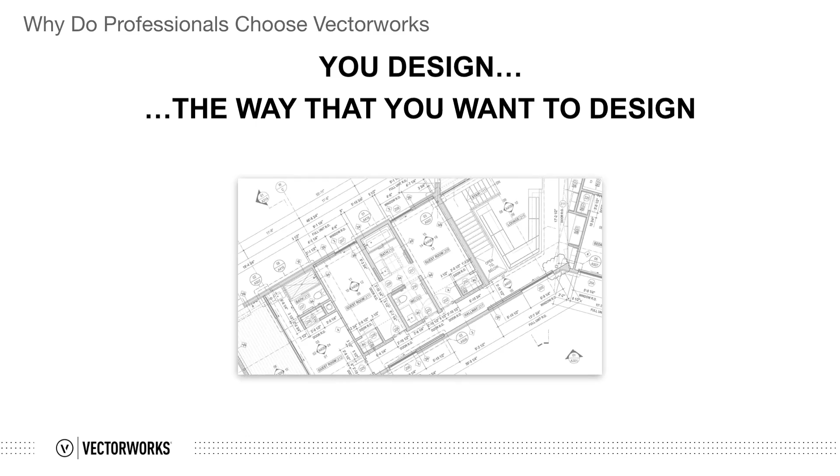This presentation is going to focus on the vast tool set included in Vectorworks to show you how design can be innovative and fun. Vectorworks is a great design tool. We're a technology leader with a user base of around 600,000 worldwide. It runs on both the Macintosh and Windows platforms, so you can design the building and everything in it. We provide the tools to help architects capture their ideas, develop them, and communicate them. So what makes Vectorworks great and sets it apart from the pack? You can design the way that you want to design. You don't have to follow a predetermined workflow. You can integrate Vectorworks into your office at any level: simple CAD, 2D, 2.5D, even 3D, or all the way to full BIM. It's your choice. So let's take a look at the tools built into Vectorworks.

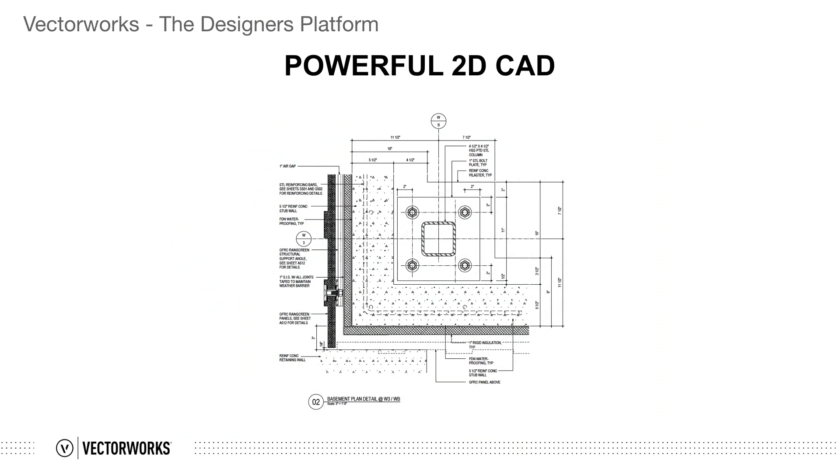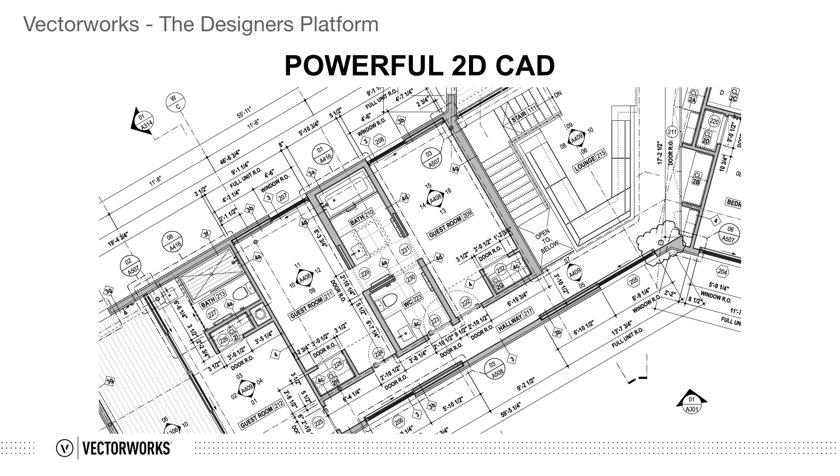Vectorworks has a powerful 2D CAD heritage. For more than 31 years, Vectorworks has been providing professionals with unparalleled CAD line work and graphics. 2.5D is where we integrate our parametric hybrid tools, such as the window tool you see here, to generate a schedule. These worksheets are bidirectional, so when you change the model, the schedule updates, and when you change the schedule, the model updates. By the way, if you're currently using a 2D CAD workflow and you're looking for an easy way to transition into a BIM workflow, this is a great way to start.

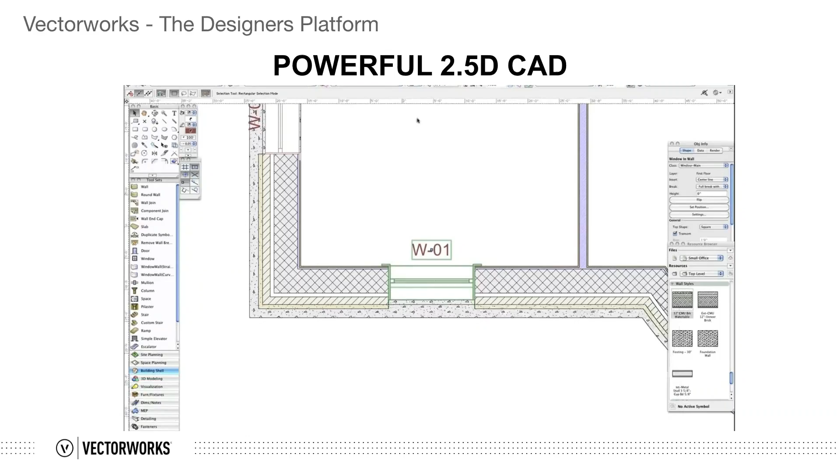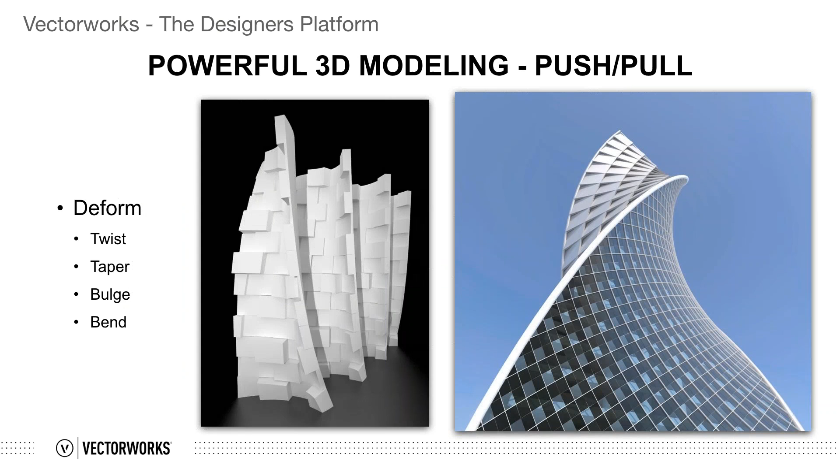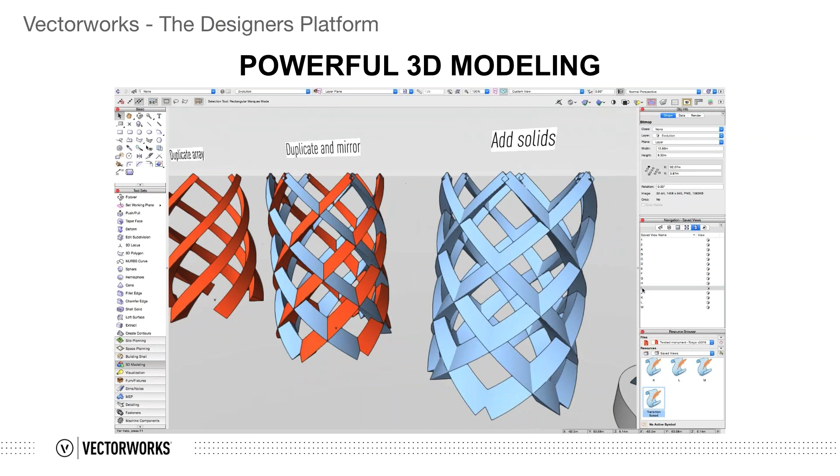Vectorworks has a powerful push-pull tool that will be very familiar to anyone who has used SketchUp. But we bring even more to the table with deformation options. Here's an example: start with a 2D primitive, then extrude and give it a twist. Extract an edge so it can be used as a path to extrude a 2D shape along. The extruded path can then be duplicated, mirrored, and converted into a solid shape. After a few more manipulations of the solid form, the result will be something that we can wrap an external structure around a building with.

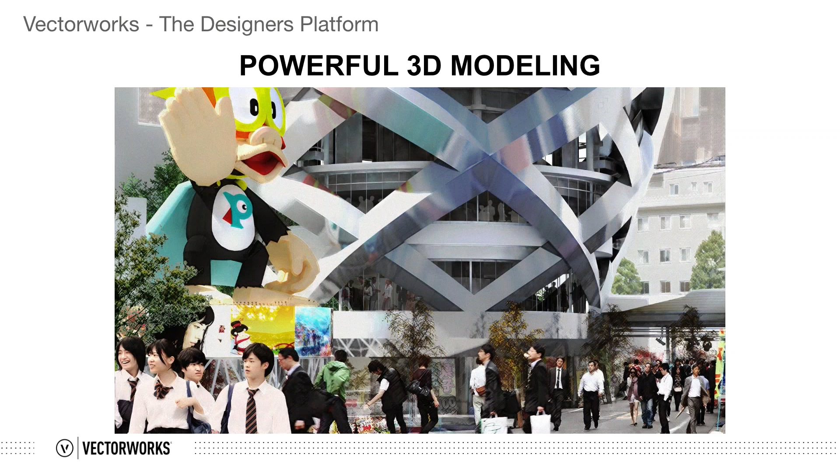Massing models for conceptual design can be produced in a number of ways within Vectorworks. Here we're going to use the push-pull tool to create a basic form that will take us all the way to BIM. Push-pull works in addition and subtraction.

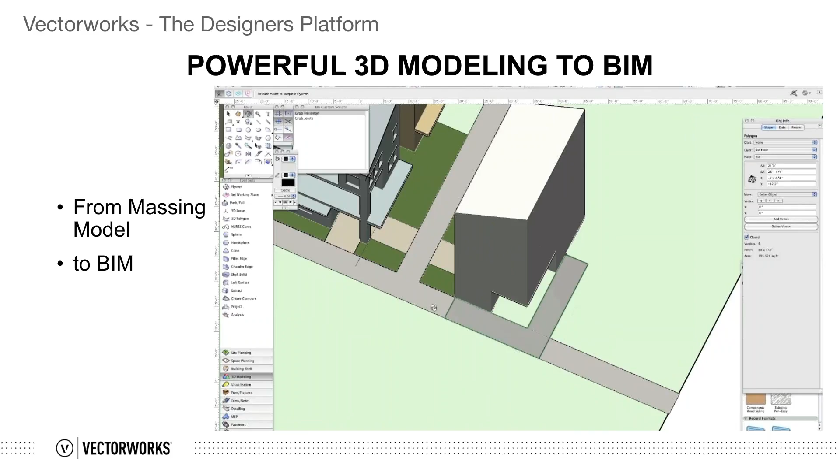Now we're going to add a few design elements like decks. We'll place them at the floor levels, and now it's time for the magic: model the floor plan.

This converts the model into intelligent walls. The walls can then be adapted with doors and windows, even a corner window like you see there. We can begin to build up the model, even the internals of the model, even add columns and posts out front.

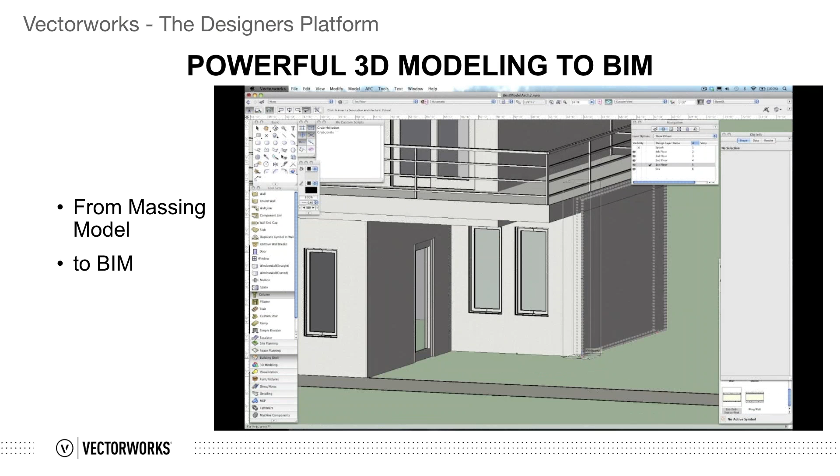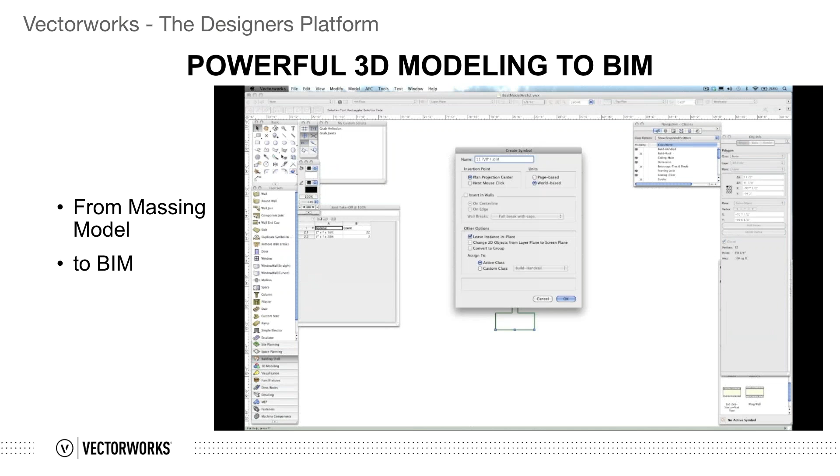We can build the model's floor package up, and we can really develop the floor package with joists that we can do takeoffs in the end. The joists themselves can be modified into TJIs, and you have your pick of how you'd like to do it. Eventually, we can render it up so we have something really nice to show to our client, a full BIM model.

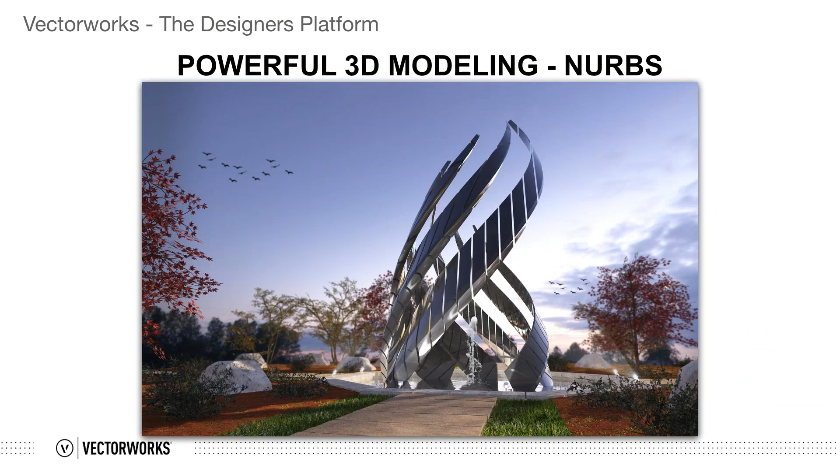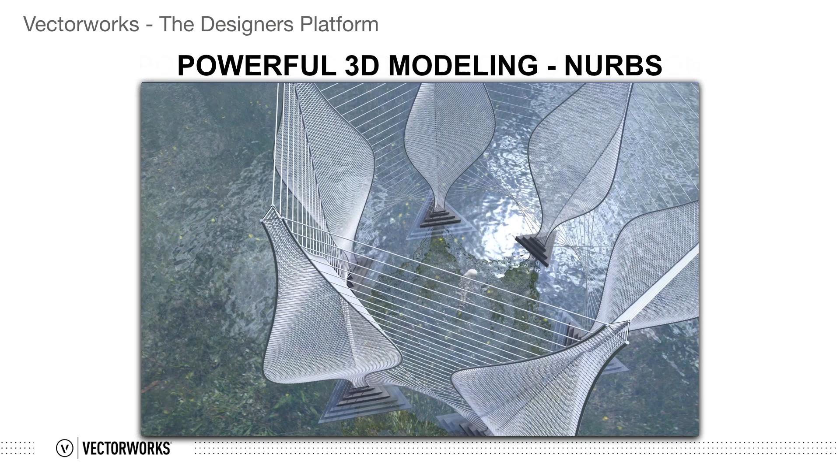Vectorworks also has a subdivision modeling tool, also known as cage modeling. It offers yet another powerful tool to make your ideas into reality. If you've never tried it, it's a lot like molding with clay.

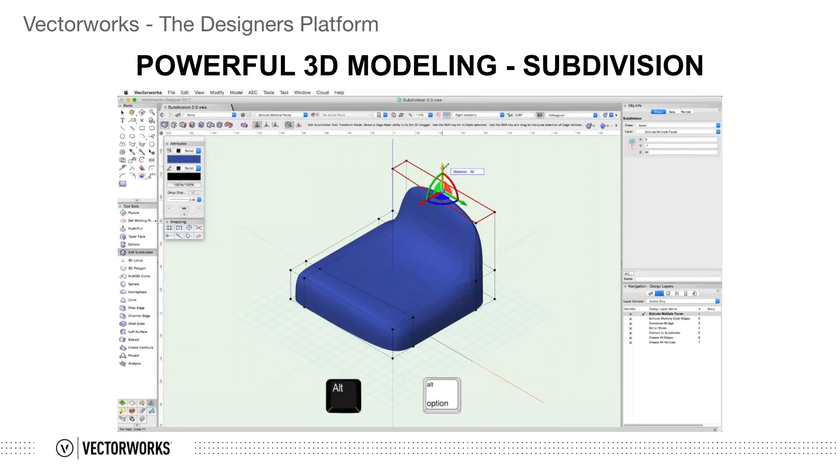Now, in its second generation, subdivision is more refined and more powerful. We added more ways to control the cage, and now we also have bridge mode. This allows you to join two subdivisions together. You simply open up the face and begin the bridging process. When you're all done, you have one model.

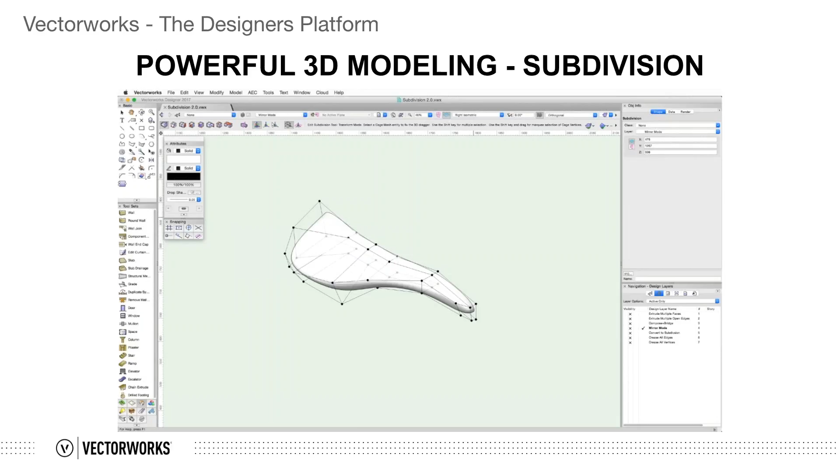We also added mirror mode, so when you're modeling, you can mirror the object around itself. It's pretty much straightforward, just like you'd think. You'd pick the axis that you want to work off of, flip it around, create your mirror, and off you go. You get the same controls, except this time it's reflective.

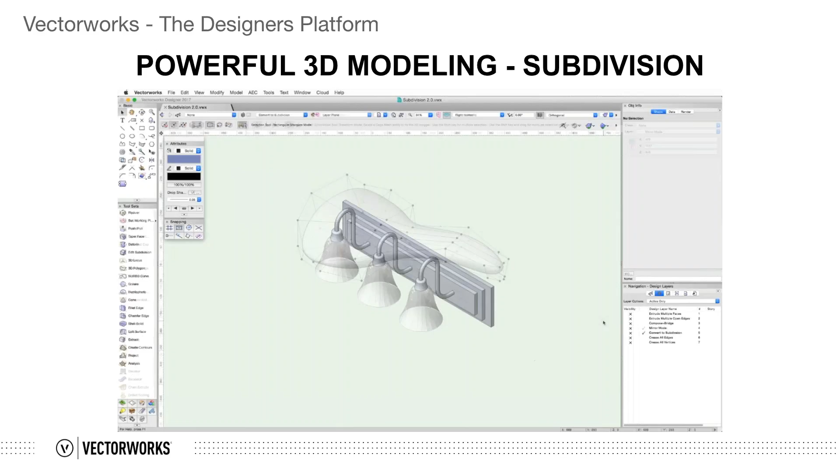In Vectorworks, we've also made almost every 3D object convertible to a cage model. This brings you control like you've never had it before.

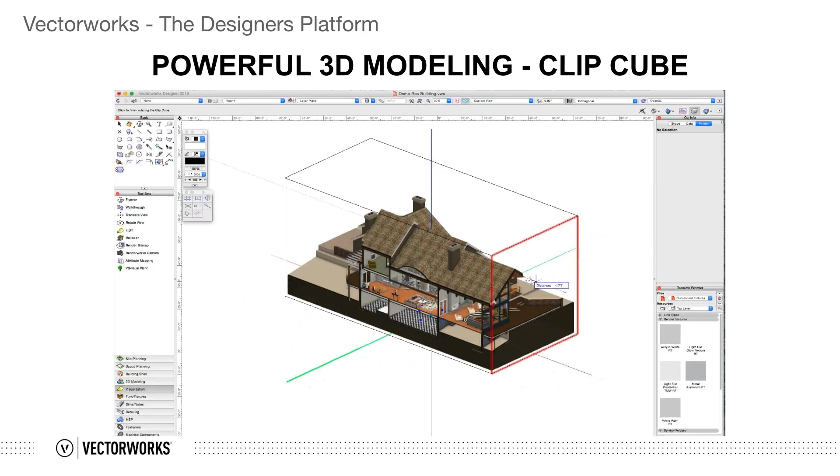So we've got our model all developed, or we're moving into design development, let's say, and we need a way to view the model holistically. That's where the ClipCube tool comes in very handy. This is a live action tool that you can move through the model both vertically and horizontally to reveal the inner spaces and study the workings.

Now let's move on to collaboration. Of course, within Vectorworks, you have all the usual suspects, and I hope some surprises for you. Most common, probably DWG, the longtime workhorse of the industry.

Yes, and now with 2017, you can bring Revit content right into Vectorworks. The bonus here is you can get content right from manufacturers and drop it right into your model.

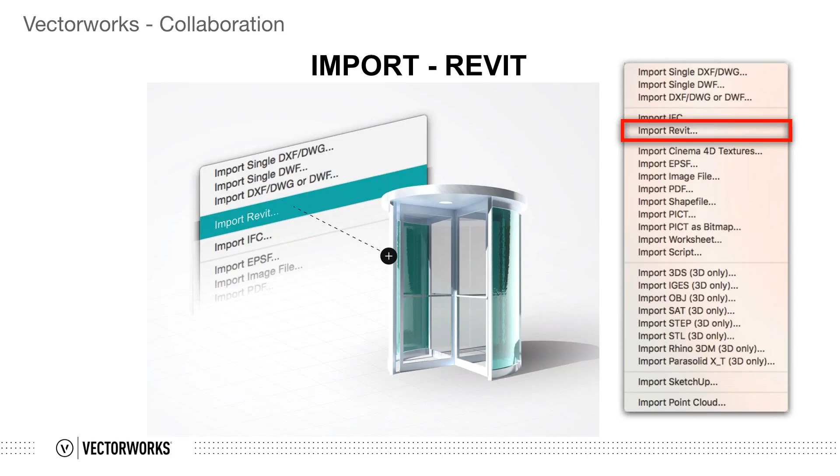You can also import PDFs. You can bring in a PDF as a reference to use as a background, or if the PDF is a vector-based PDF, then you'll be able to snap to it, or you can even ungroup it and get to the elements buried within it.

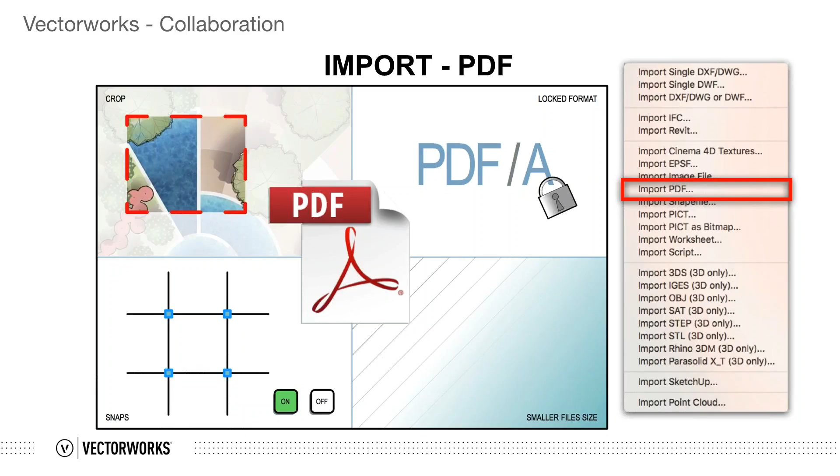Vectorworks offers the ability to import GIS information in the form of shapefiles. You can choose the appropriate layer of information from the shapefile and then use them in your model. In fact, in Vectorworks, you'll be able to create a digital site model from the imported contours you use, and use our comprehensive set of tools to modify the terrain and even calculate cut and fill.

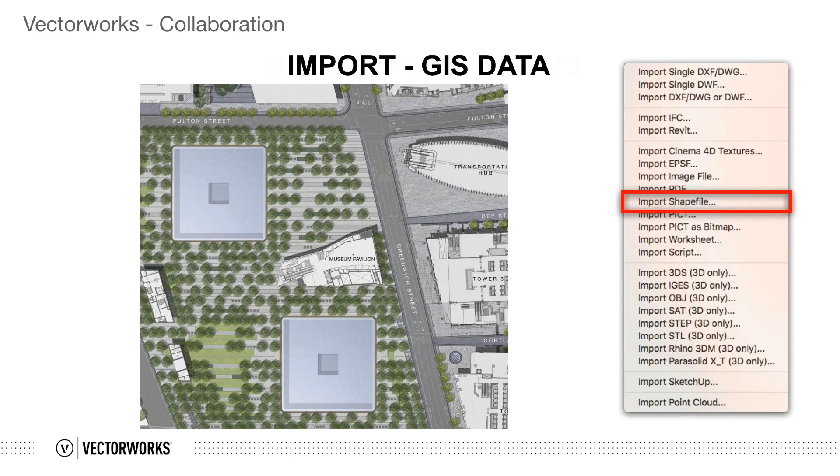Point cloud is a relative newcomer for capturing data using 3D laser scanning technology. Vectorworks has the ability to directly import and organize point cloud data, letting you move forward with accurate documentation of existing conditions.

So how about export? Again, Vectorworks has a lot of options. Our DWG export is second to none. And just for bonus points, we support a mountain of legacy, going all the way back to version 12, for both import and export. So your years of work are not lost.

Our PDF export supports 3D, and with the 2017 Service Pack 2 release last week, you can now send PDFs to Bluebeam. And in just a minute, I'll tell you why that's important.

IFC, or Industry Foundation Classes, is an international, vendor-neutral, open standard for sharing BIM models. IFC opens the world of interoperability between Vectorworks and the vast landscape of software tools used by your consultants and others in the AEC field.

IFC will replace DWG and will become the future of file sharing and coordination for professionals within the AEC community as BIM grows.

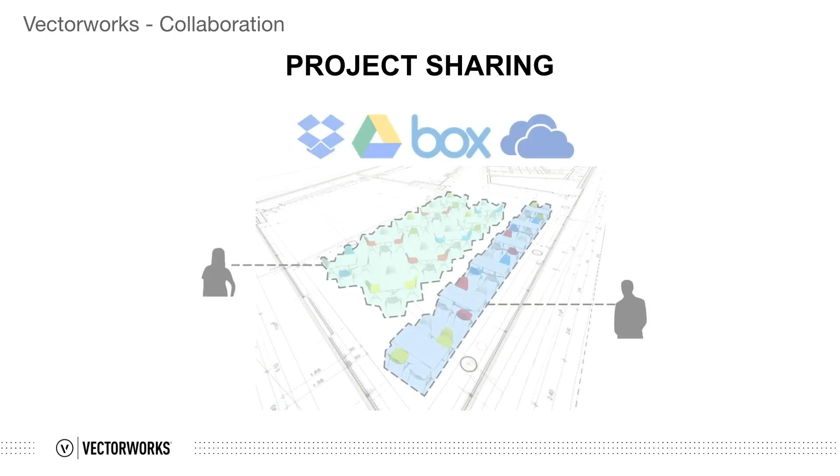Another area of collaboration is project sharing, done primarily in Office. Project sharing allows more flexibility for how firms decide to divide the workload of a project. You can check out from the layer level all the way down to the object level, and Vectorworks gives you far more flexibility in how the work is divided. You can access the project file through cloud-based storage, and you don't need BIM server software or a high-end dedicated server.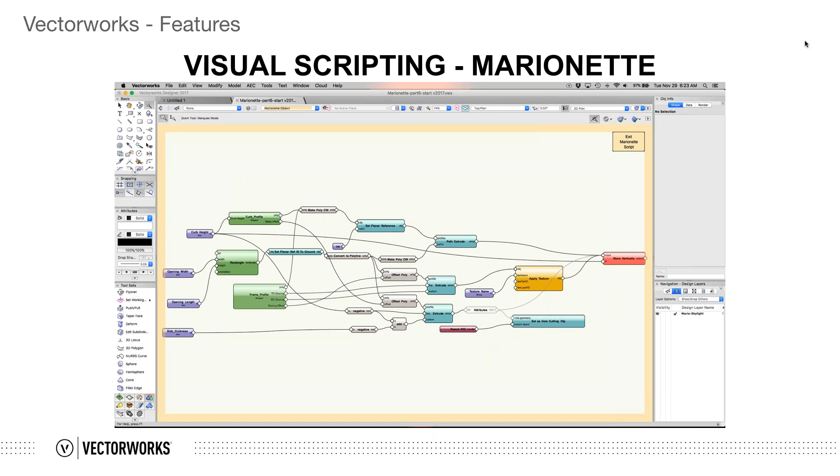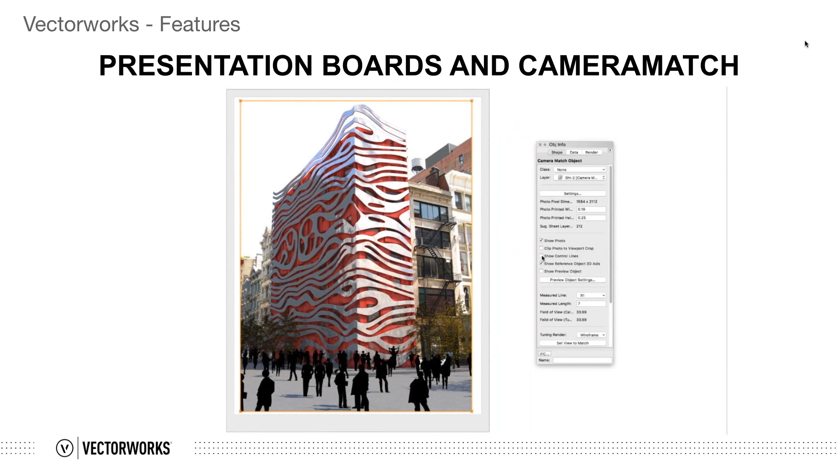The new Camera Match feature in Vectorworks allows you to integrate your design with photos from the actual site, easily creating composite images that match the perspective of the photo, giving clients an enhanced view of their project in context. Creating custom view crops and masking out other elements is easier since it's done within Vectorworks and not in an external photo editing application. And yes, you can do both exterior and interior views.

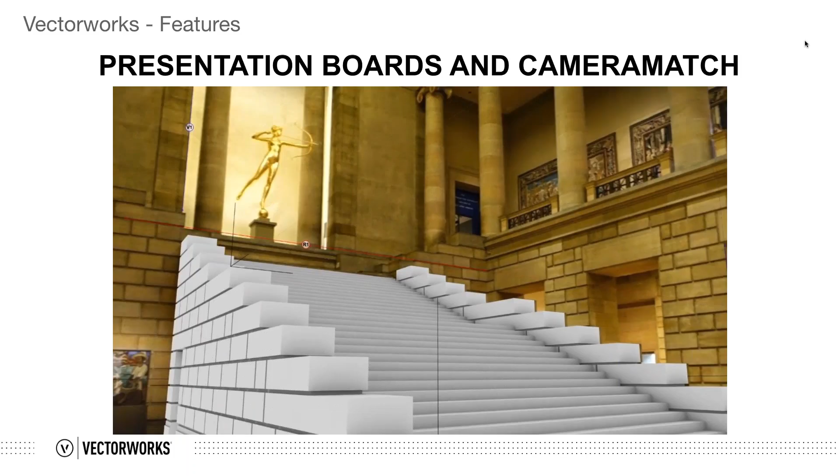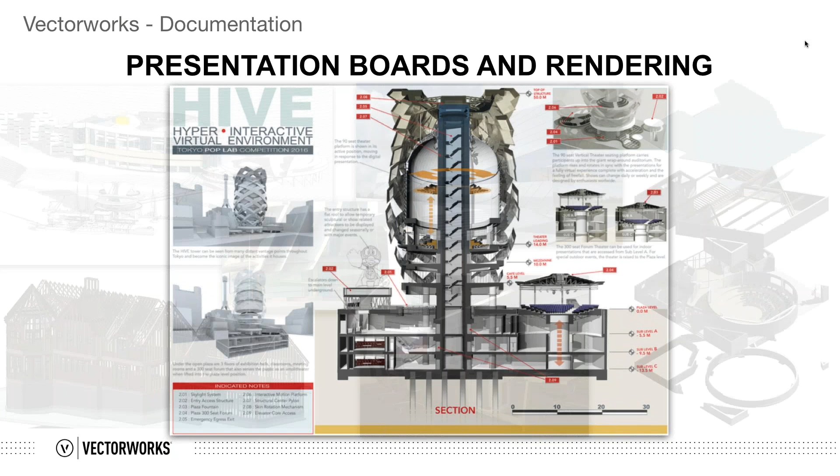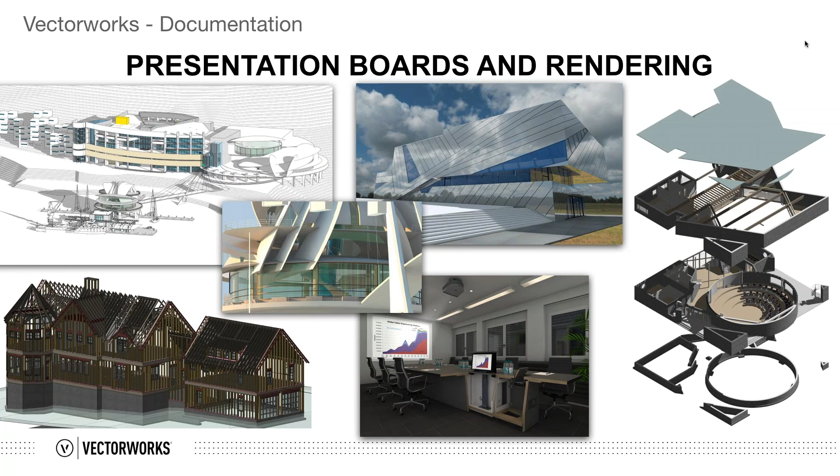Creating presentation boards is easy in Vectorworks. From rough sketch style to photorealistic, Renderworks, the built-in rendering engine in Vectorworks, saves time because you don't have to switch to an external application. Choose from stock rendering styles or create your own using HDRI backgrounds. We have ambient occlusion and caustics, along with camera controls like focal length, f-stop, and shutter speed. You can create compelling presentations from right inside Vectorworks.

But presentation boards can only go so far. They're stranded in flatland. Vectorworks can take your designs to your clients like never before with WebView and virtual reality.

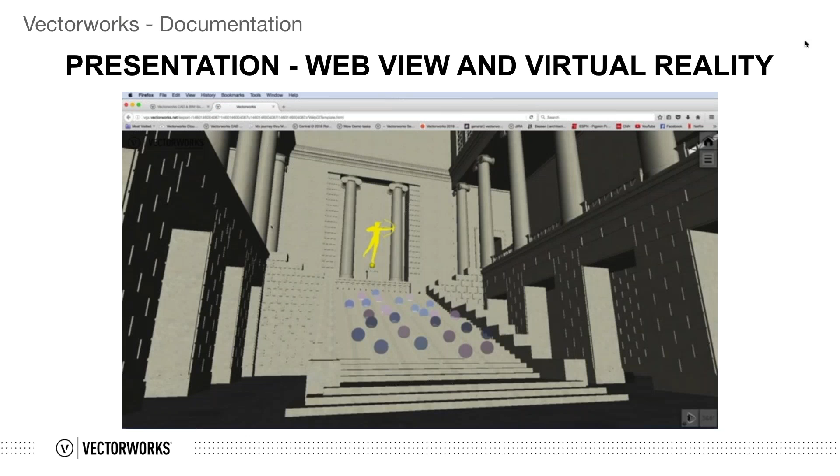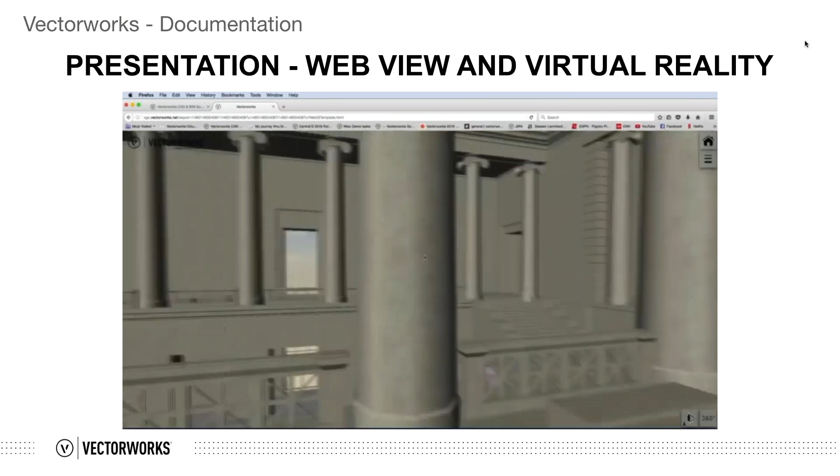WebView puts your model on the web to be viewed in any browser. You can fly around or switch to first-person mode and walk through the model as easily as navigating a web browser. Vectorworks knows where your feet are in the model, so as you navigate up and down stairs, it'll take you right through. You can even send the tiny URL to a mobile device, such as an iPad, and it works there too.

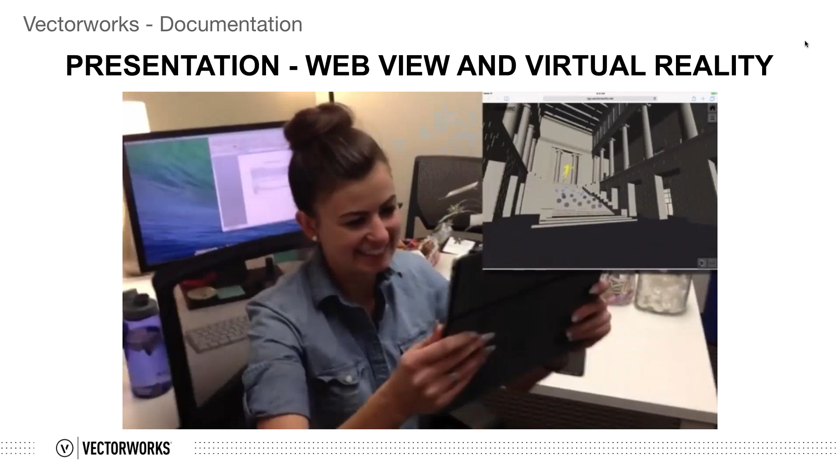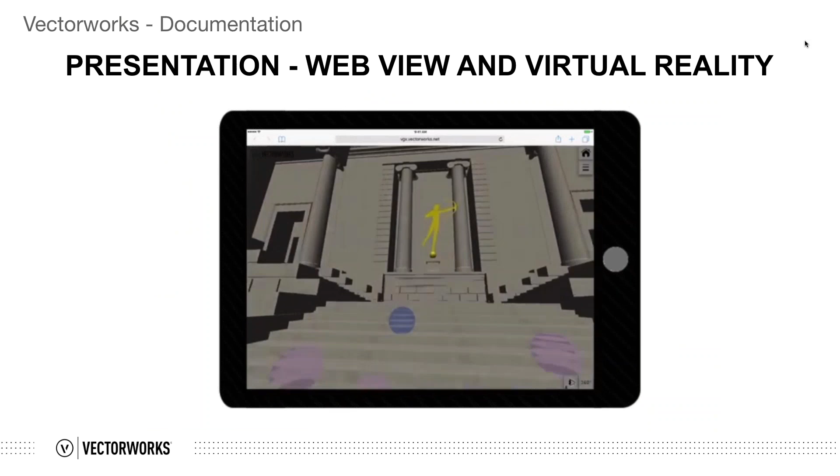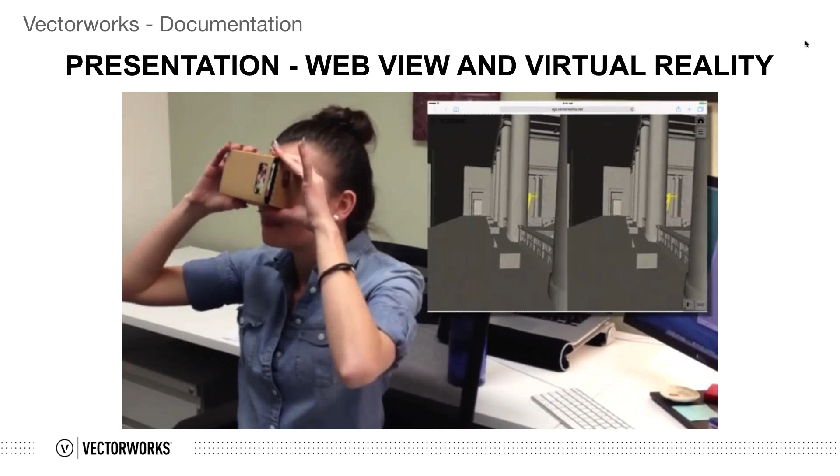You can pan the device around up and down, and when you look far down, you'll see a set of controls that can operate for automatic motion to move you through. Just like on the desktop, you can move through the model freely and fluidly, feeling everything, bumping into the walls. But we took it one step further, and that is we went to virtual reality with stereo mode. With stereo mode, you can go to a smaller device, such as an iPhone, plug it into a Google Cardboard, hold it right up to your face, and there you see the model as if you were actually inside of it in full 3D depth. The experience is actually quite immersive.

Vectorworks does have a complete set of mobile tools for viewing your work on the go and sharing it with your clients. 2D, 3D, and BIM, Vectorworks has you covered.

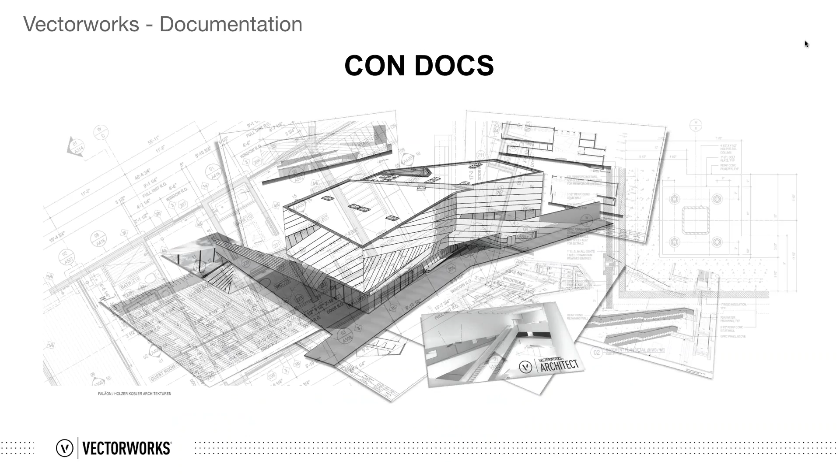But in the end, we all need to produce documentation, our con doc set. Vectorworks brings it all together beautifully with great 2D printed line work that Vectorworks is famous for. Plans, sections, elevations, and details are all coordinated from your model, and when changes occur to the model, your con doc set will be updated accordingly. We also have outstanding control of line weights and additional graphic elements such as patterns, hatches, tiles, gradients, and images, any of which can be completely customized to meet your firm's demanding standards.

Thanks, David. What a great job. Amazing, really. Even though we use the program here in the office, I saw some things there that I wasn't personally even aware of. So now we're going to turn to another very experienced Vectorworks user who also is a principal in an architectural firm.

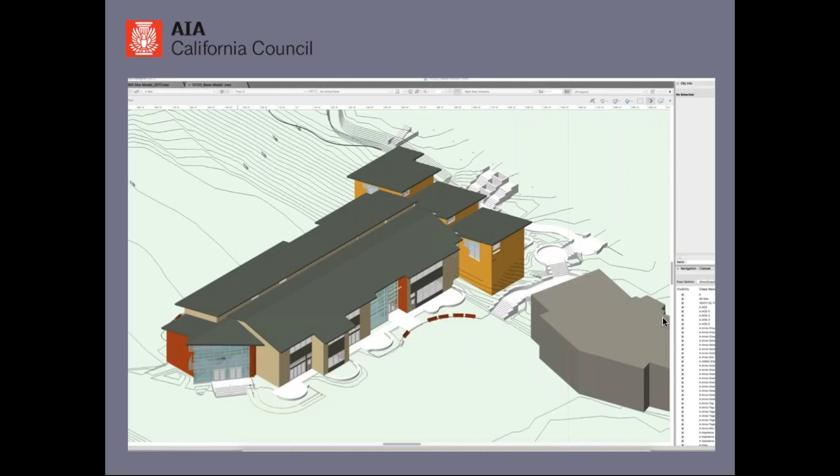Because we're working in a public bidding environment, our clients demand really tight, well-coordinated drawings where we have few or almost no errors. And BIM really helps us do that.

These are some images of a school that we just finished building. This design started, I think, in late 2013, and it was constructed over 2015 and just finished this past summer.

We use BIM to create a workflow for our design process that helps us actually starting from the very beginning of design. For us, it's really important to have a three-dimensional work environment so that we can show our clients, even early in the design process, what their building is going to start to look like, so we can walk them through their spaces and really get good decisions from our clients.

We use this all the way from early design through construction documents and also through construction administration.

So probably most people have some kind of an idea of what BIM is. For us, BIM means using just a single instance of a design, in this case a computer model, to represent the design. And then from that model, everything else is taken. So the idea is you draw it once, draw it right, and have a very good set of documents with minimal coordination errors or problems, and a design that you can really visualize all the way through.

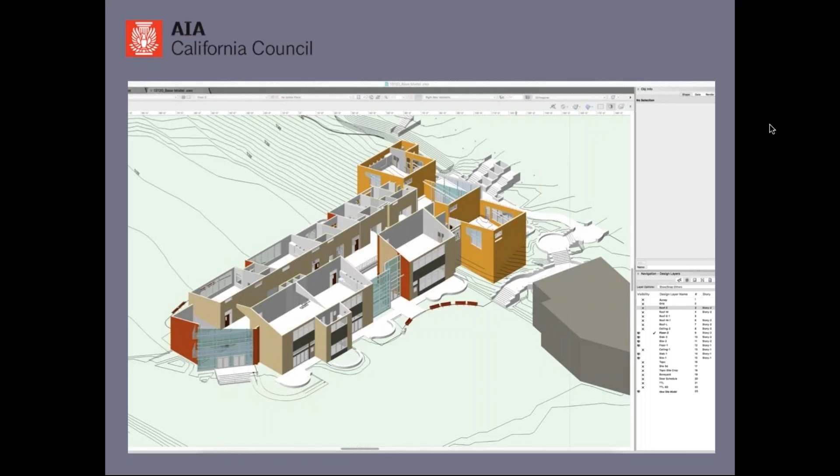So the advantages are better coordination, fewer errors. It's a reality-based paradigm because it focuses on building a model rather than making a drawing. And for us, we find that it's a faster, more productive working environment.

So a lot of BIM programs, or some CAD programs, require that you already know a lot about your design before you really start to use the programs effectively. We've designed our workflow around Vectorworks so that it's actually a design platform, so that we can really start with minimal information.

We start with the program of the building, and we start to develop maybe a massing model or a sketch plan, or even a concept diagram, a bubble diagram. And then slowly we transform that into a model, which is our design tool. So that way, the work that we begin with informs the design all the way through.

And then as we near completion through the various stages of design, we can get our plans, our sections, other drawing views just out of this one model.

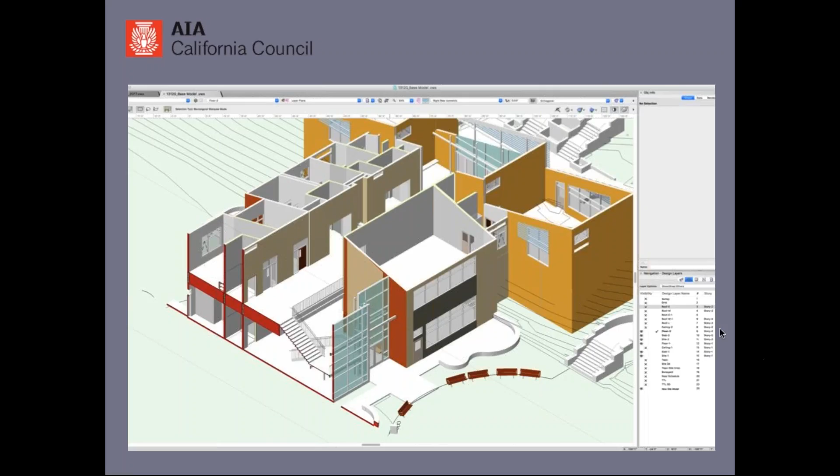There are a lot of ways you can look at the model. I've been showing some cutaway isometric views, and I've been showing a simplified sort of rendering mode that Vectorworks uses called OpenGL. You can actually run this as you do your work. This isn't really a rendered mode per se. It's just a slightly better way than a hidden line view or a wireframe view of looking at the model.

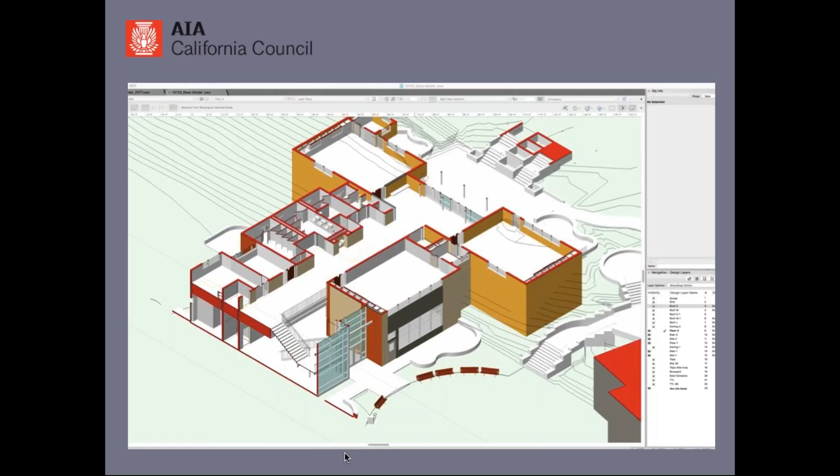We can also do interior views. This is slightly rendered, or slightly touched up with Photoshop, but it's primarily a view straight out of Vectorworks. And this is a classroom study for the project.

Again, you can zoom in on certain areas and actually work live in 3D. In this case, if we were designing this teaching wall, this wall of casework in a classroom, we could work on it in 3D and hide the rest of the model, getting a lot of really good information as we did our design and studied the relationships.

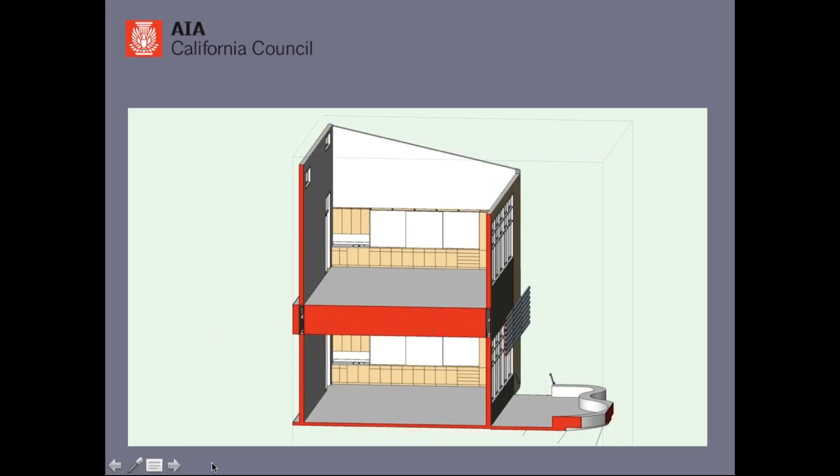So this is just a wireframe view of the same model. You can see there's a lot of information just in terms of line work embedded in it.

I showed this to give a sense of how we build up the information in the model. Almost all the pieces of this model are built of parametric tools. In other words, you enter parameters and it becomes something - elements like walls, doors and windows. The casework or cabinets I showed earlier are parametric objects.

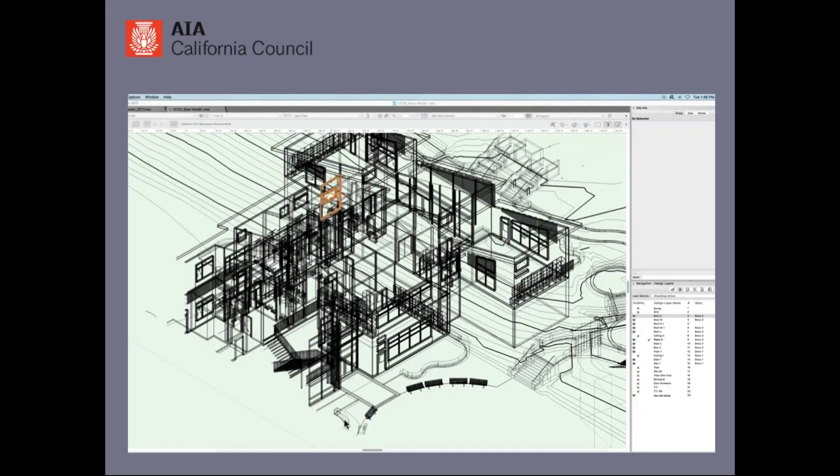Stairs, furniture, all of these are parametric objects, which makes it very easy to design. You can also import a lot of standard building elements like drinking fountains or benches. Many manufacturers have standard model elements you can bring right in.

So this is an example of a formatted plan drawing sheet. You can draw in either 2D or 3D mode, and depending on what you're designing, one might be easier than the other. I tend to flip back and forth to look at different things in different ways while designing. But even when you're drawing in 2D mode, which can be a lot of the time, you're still entering the information in 3D.

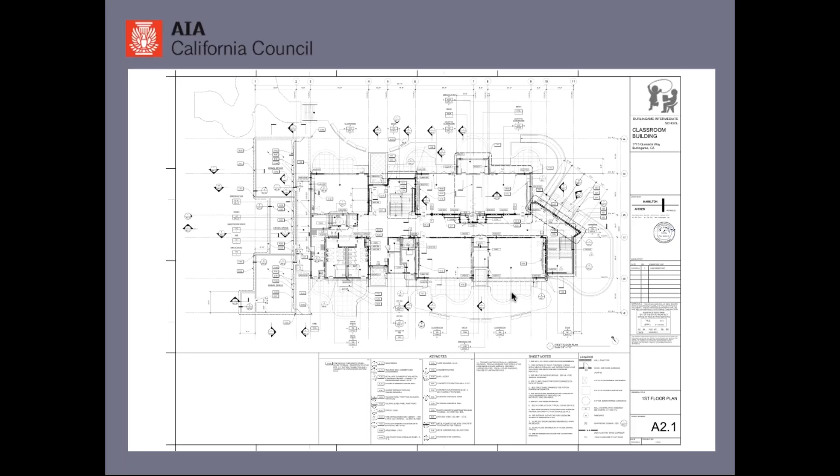So even if you're drawing in plan, you can at some point look at the whole building as a model, and you'll be entering 3D information the whole time.

This is a presentation plan we did for a meeting, just to show our clients some of the relationships between classrooms. It's very easy to manipulate this same information, just adding a little rendering or color, to make a plan work for one purpose rather than another.

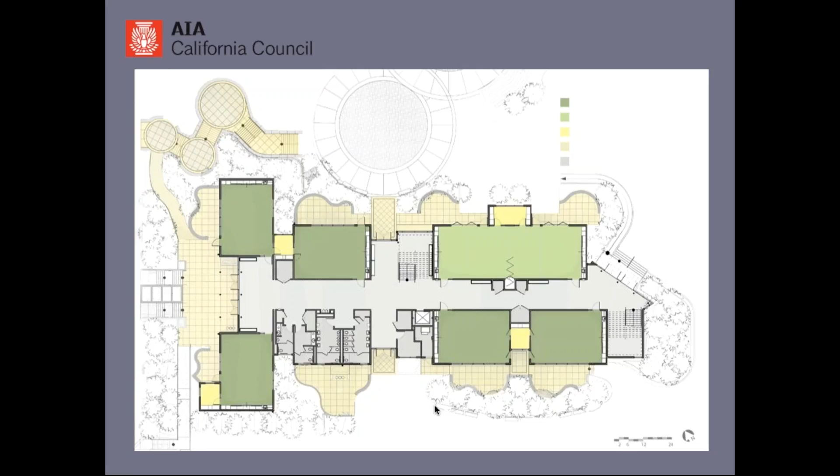As I said, as you model, you're actually creating elements that can be presented in 2D or 3D. These wall sections were cut through the building. There's a lot of information from the model in these sections, and we've added additional information to annotate the drawings and make some elements more detailed - things you wouldn't necessarily want to model, like some of these beam intersections. So we're constantly developing our documentation and detailed design, but the model really forms the basis of it and helps make sure that what we're designing is true to the model.

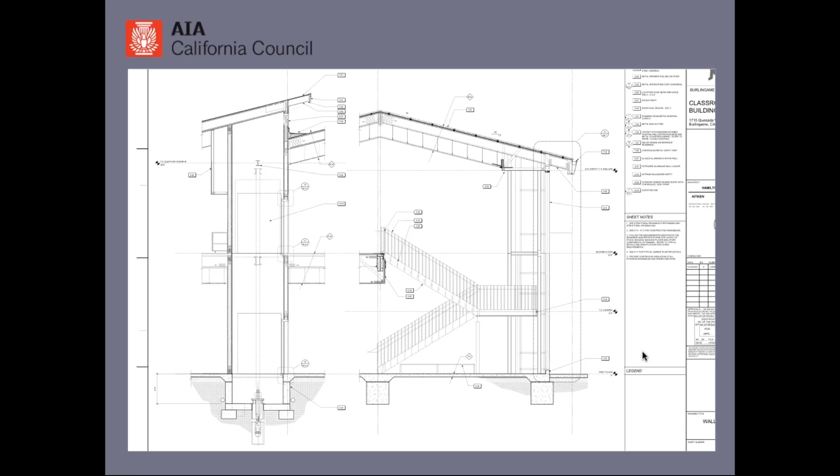So as long as it's tagged to show up in a schedule, no one's going to forget it or give the wrong dimension. It's always going to be there, coordinated with your model.

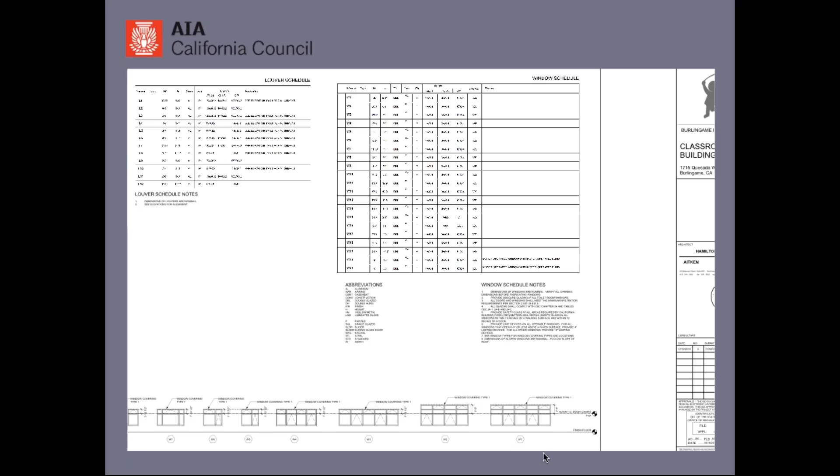You can also interactively influence a model element through many of the schedules. For example, in a door schedule, you can set it up so that if you want to change a door from a 3-foot door to a 3'6" door, or change the height from 6'8" to 7 or 8 feet, you can do that right in the schedule, and it will actually affect the model.

We use Vectorworks. Our office is a medium-sized office. For most projects, we have several designers working on a project, and on almost every project, we have multiple people accessing the files to create different drawings. Vectorworks can accommodate this - they have a work sharing system so that multiple people can work on the same file at once, which facilitates that.

We do have a BIM manager that helps us keep everything organized and on track. We take a lot of advantage of Vectorworks training, as well as third-party trainers, and we also do a lot of in-house training. It's really important that people are doing it, know what they're doing, know how to use the program, and that you've set up your office workflow so that it works well with the software.

That would be true probably of any program. I think the software documentation for Vectorworks is very good - it's pretty easy to find answers. Also, there's an increasing number of very good third-party documentation for Vectorworks. I also think it has excellent user support. We can always get our answers very quickly.

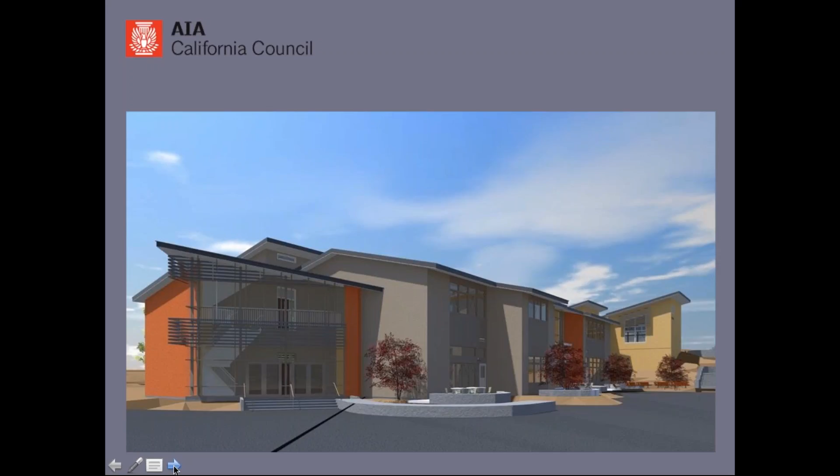So this is our last rendered view. This isn't a super high level of rendering - this is something we'd probably do in-house, but it was done entirely within Vectorworks. There's no added rendering at all.

And this is the building as it turned out. So thank you, and I will turn it back to the moderator.

Hey, thanks, Chad. Great job. Wow, you've really embraced this tool in a profound and comprehensive way. Next up, we have a sort of a tag team from my own office. Alex and Dane are with us together. They're both relatively new users of Vectorworks and have made the transition from sort of flat CAD into the world of BIM. Take it away, guys.

Hey, can you hear me? Yep. Thank you very much, Mike. My name's Alex, and I've been working with Mike about 3 years here in Applied Architecture, and I'm joined by my coworker Dane Jordan. Hi, I'm Dane. I've been working at Applied Architecture for about 9 months now. Yeah, and I've been using Vectorworks for a little over a year now, I believe, and I've really enjoyed getting to learn a lot more about the software and the different capabilities that it has.

Just wanted to show a few examples of some projects that we've worked on over the past year. A number of these are primarily residential. We've got some single-family homes, some new construction, some remodels, and a multifamily project that we've worked on as well. Just looking at a variety of different project types and the different opportunities that we've had with Vectorworks.

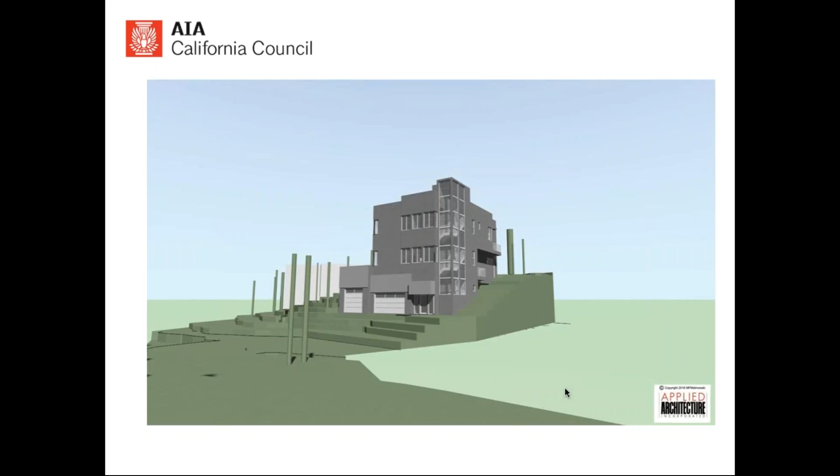This project here is a new construction where the client was really excited to be able to see the building and the design in 3D, and we've been able to utilize Vectorworks 3D modeling software to illustrate the design in conjunction with developing the construction documents and the 2D plans that are needed for getting the building permits and discussing the project with contractors as well.

And in the past, we've actually used AutoCAD and SketchUp primarily as kind of like a tag team, using both softwares to illustrate the design to the city, clients and the contractors in 3D with SketchUp's modeling abilities, but then also having to develop the full project in AutoCAD as well. And what we found is that the clients were very appreciative of the 3D modeling, but sometimes didn't want to pay for the additional time it would take to model the project, or we would just end up having a model that could not be used for construction documents long term.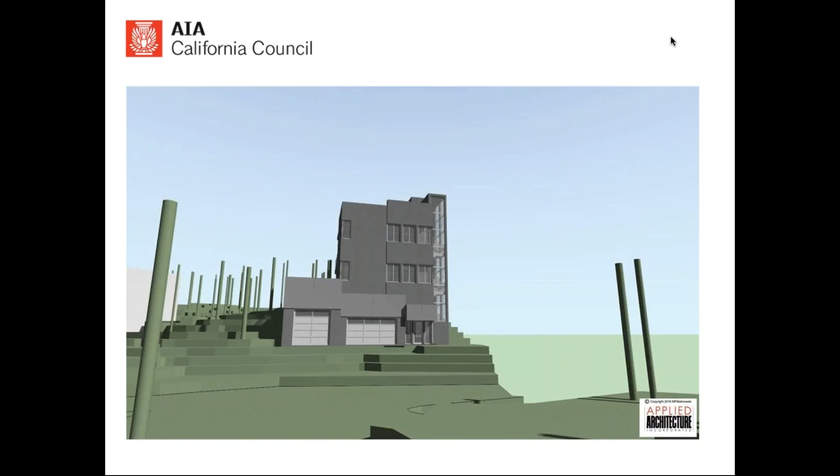And what Vectorworks has allowed us to do is to merge those two capabilities into one platform and create a 3D model at the same time as developing all of the plans and elevations that are needed to create the construction documents.

So I have a background in AutoCAD, SketchUp, Rhino, as well as Vectorworks, and they all sort of have a deficiency in some areas. SketchUp fails to really give you a solid way to create construction documents. AutoCAD has really limited 3D capabilities, and then Rhino has the strongest pure 3D modeling. You can do a bunch of freeform and really cool, crazy things, but creating construction documents with Rhino is sort of wonky as well.

But Vectorworks is sort of like a hybrid of all of those. You saw earlier in the presentation all the cool, crazy 3D forms you can do, but it also has a really solid platform for creating construction documents and has relatively intuitive 3D modeling like SketchUp. And it's really allowed us to interact with our clients in a much better way than simply portraying the design in 2D as well.

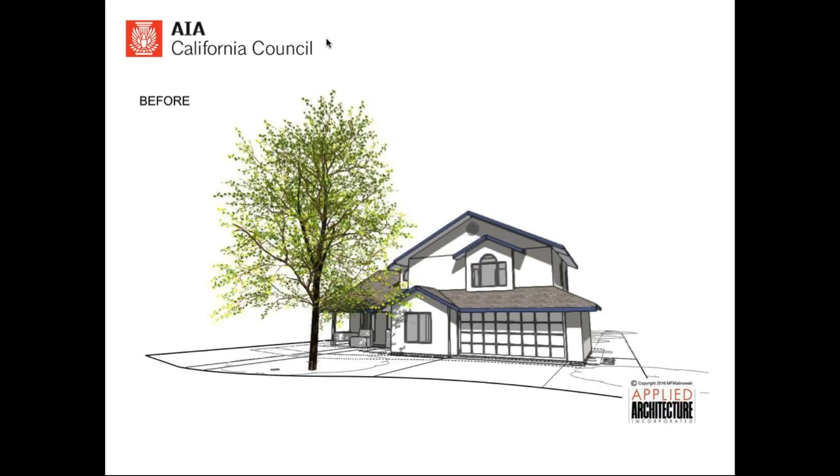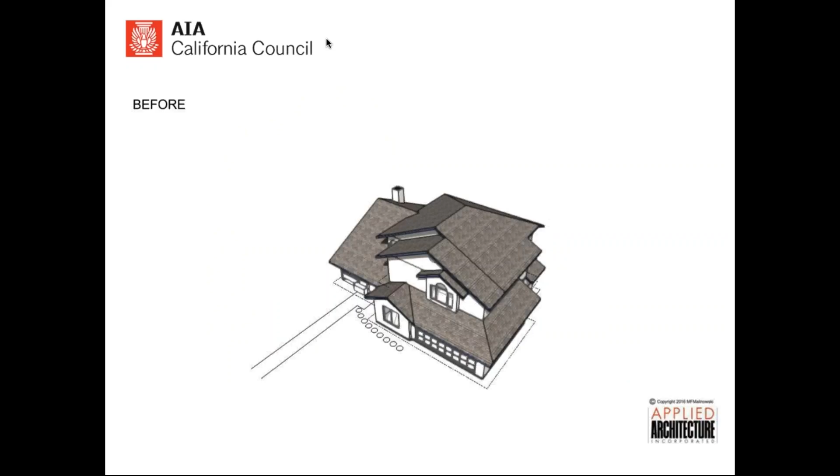What you see here is a project that's actually a large addition that we worked on, where we were able to model the existing project relatively easily in 3D, and then in the same file modeled the proposed project. And so we're able to flip back and forth just by adjusting the visibilities in the design layer with the clients in real time, and illustrate to them the difference between what their house looks like before and after, without even needing to create 2D static renderings.

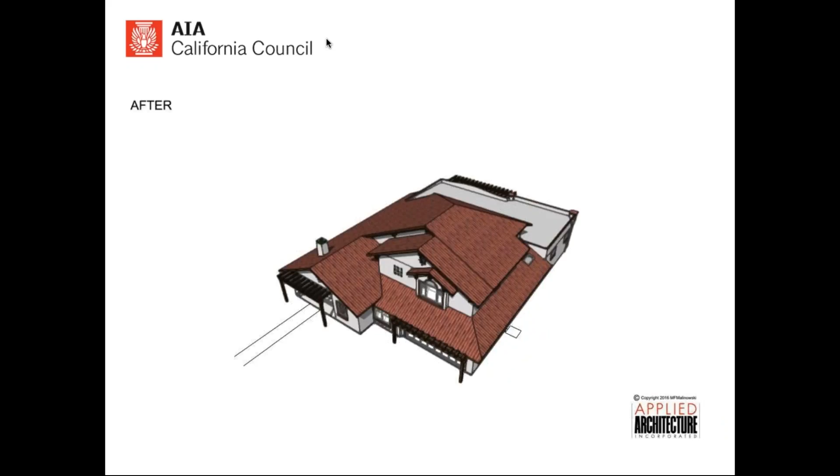We're able to show them the model in 3D and spin it around even while just interacting with them. And so we found that that's been really helpful, and we're also able to export 3D PDFs and actually give clients files that they're able to use on their own computers.

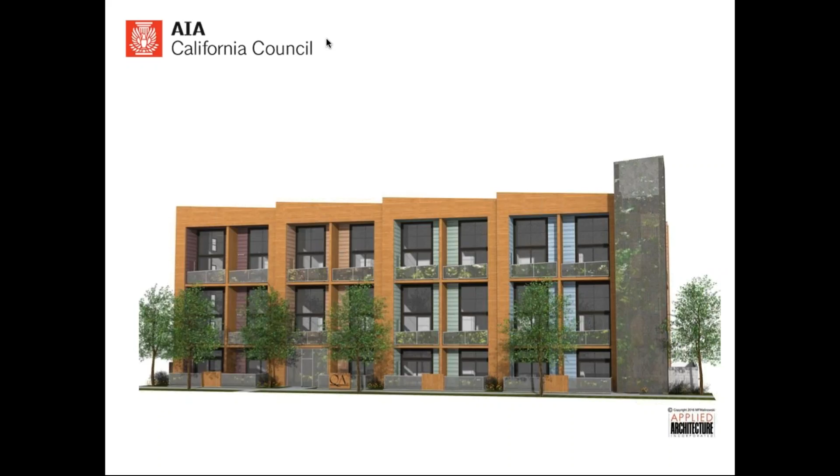What we have here is the multifamily project that we've worked on with Vectorworks, and we found that we're able to create a lot more detailed files just by accessing different components from the online libraries and the different things that are available through Vectorworks Service Select and the various resources available online.

As we've gotten more experience with Vectorworks, we've found there are a lot more opportunities with the built-in rendering software than may be available in other programs. What you see in some of these images are decals applied to various render surfaces, and we're able to add a good amount of lighting and shadow as well.

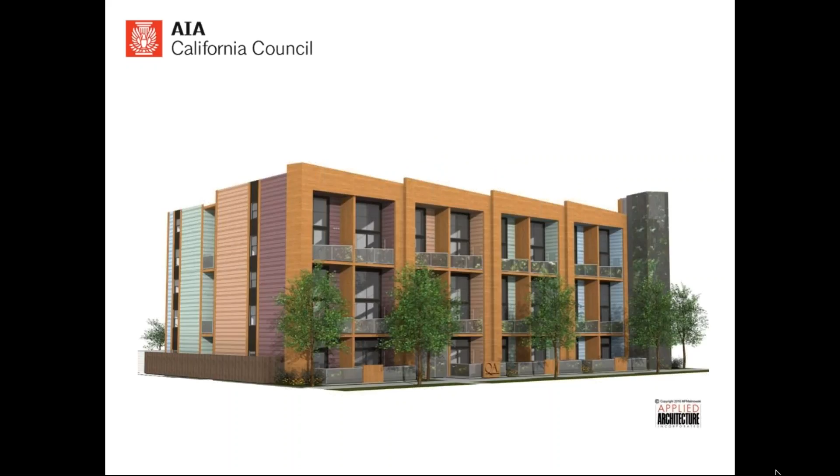What we've noticed is that using Vectorworks has become a process of thinking differently. At first it was a bit difficult to grasp how modeling components worked. It's similar to other software in many ways, but it also created some challenges in understanding the difference between 2D drafting and 3D BIM modeling. We found that the Service Select program and Vectorworks support staff helped us learn the program really efficiently.

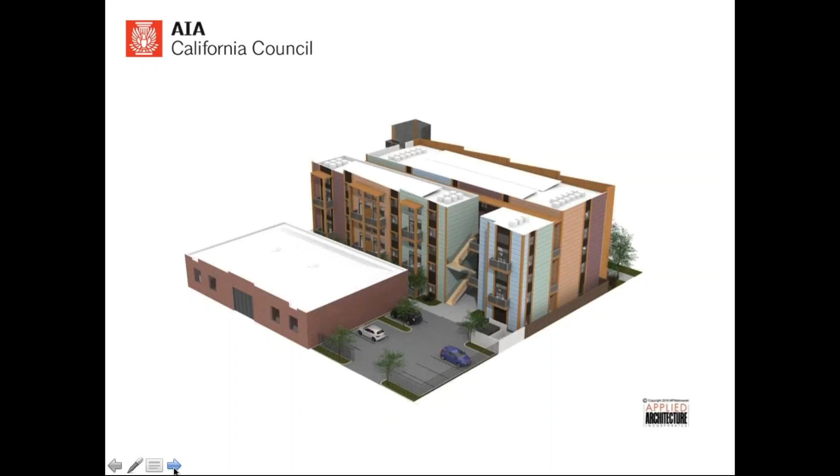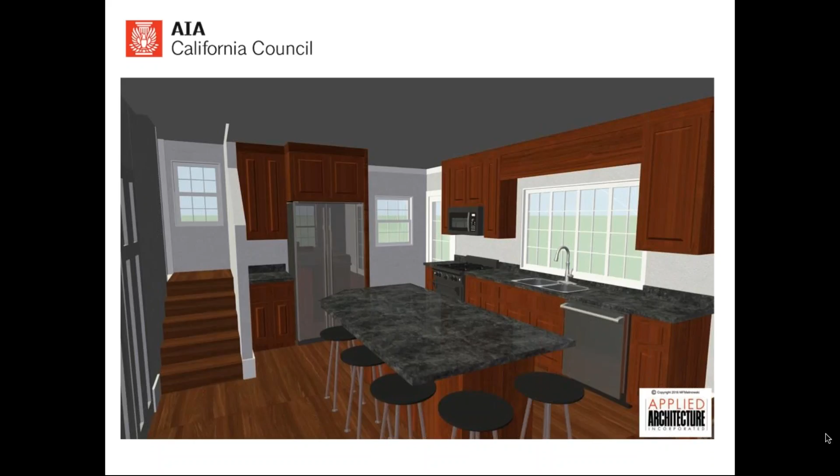What you see here is an interior space where we were remodeling a kitchen for a small residential client. This didn't include any addition or new construction, but mostly involved removing a wall between the kitchen and dining room. In the past we likely would have developed this in SketchUp and modeled it in 3D so clients could experience the space, but that model couldn't be used for construction documents. Here we're able to provide a much cleaner, more crisp rendering of the space while also using the same model for construction document purposes.

It's also much faster to create this rather than building it in CAD and then SketchUp, since everything can just be input: cabinet sizes, countertop heights, component sizes. All of that can be built while creating the 2D drawings, and then it's automatically extruded outward into 3D. You open the 3D view and it's all ready to show the client.

Yeah, the parametric modeling has really allowed us to work a lot more efficiently and even interact with clients in real time during meetings, and they really appreciated the opportunities that Vectorworks has created.

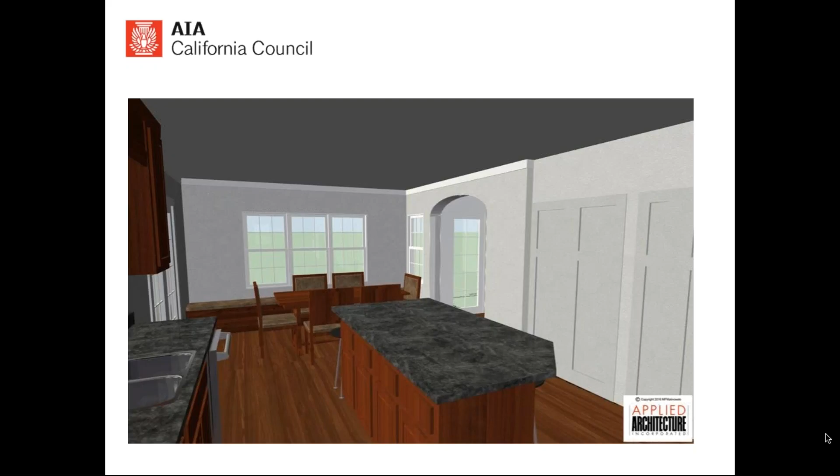So yeah, with that, we'll turn it back over to you, Mike.

Hey, thanks guys, great job. It's really incredible to see the range and variety of ways the tool is being used in real-world offices.

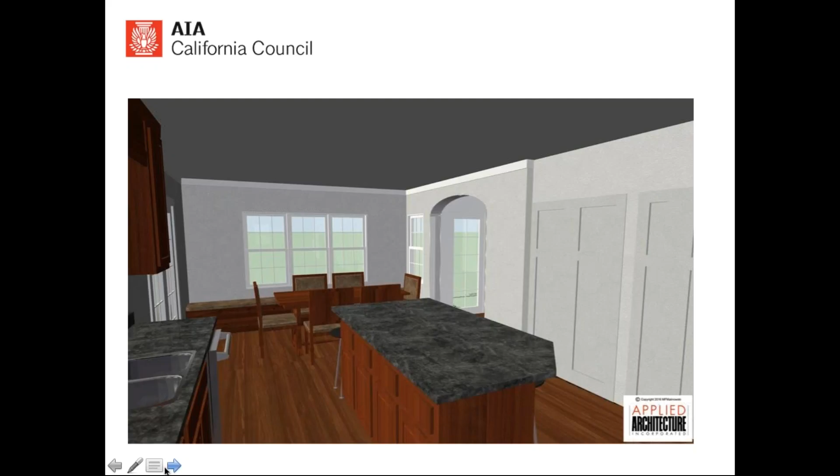I'd like to find out from Amy if we've had questions come in. I did have some questions that I was asked prior to the meeting, but if we have people online or that have typed in questions, we'll take those first. Amy, are you with us? Sorry about that, Mike, no questions just yet, but if you want to start we can jump in with extra questions.

Okay, one question I'm often asked, and I don't really have a great answer for since my firm is so small, I'd like to ask Chad. Given that you're a mid-sized firm doing larger projects, and I'm sure you have a fairly heavy schedule given the uptick in the economy, what about the challenges in finding staff? That's probably the most common question I'm asked. If you're not on the mainline platform that's used by the majority of firms, what happens when you want to hire somebody?

I'd say it's becoming increasingly easier to find people with knowledge of Vectorworks. There's a pretty robust program in schools, and an increasingly larger number of firms are starting to use Vectorworks. But even if someone doesn't know Vectorworks, we've found it's easy enough to learn, and it shares so many concepts with other programs that it doesn't take people very long to get up to speed. We have a well-developed workflow that we've documented, and between our in-house drawing manual, training, and other staff helping out, it's pretty easy to get someone up to speed and drawing productively in Vectorworks.